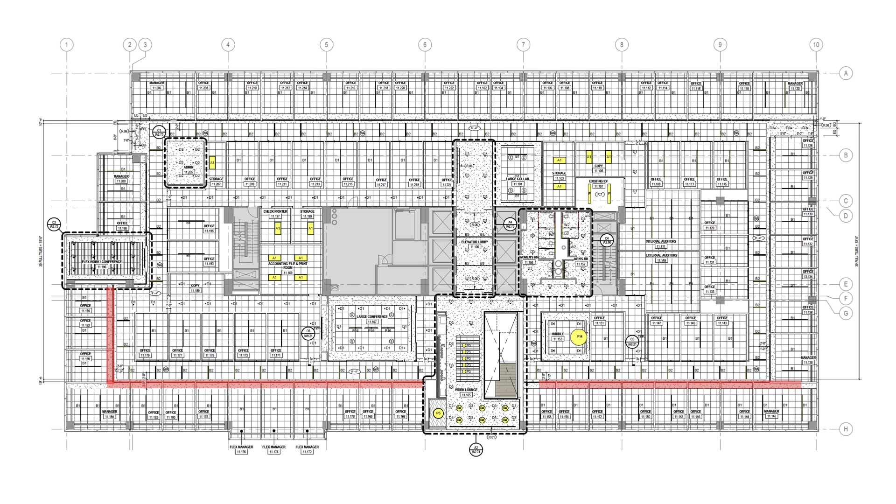On this segment of Build It Better, we're in Houston, Texas, and we're standing in front of a vintage 80s or 90s office complex, multi-story, multi-building, and it's going through a major facelift with a lot of new tenants moving in. There's one tenant that's taking multiple floors, and they have miles of corridors separating the perimeter offices from the interior offices. And separating those offices from the corridor is a bulkhead.

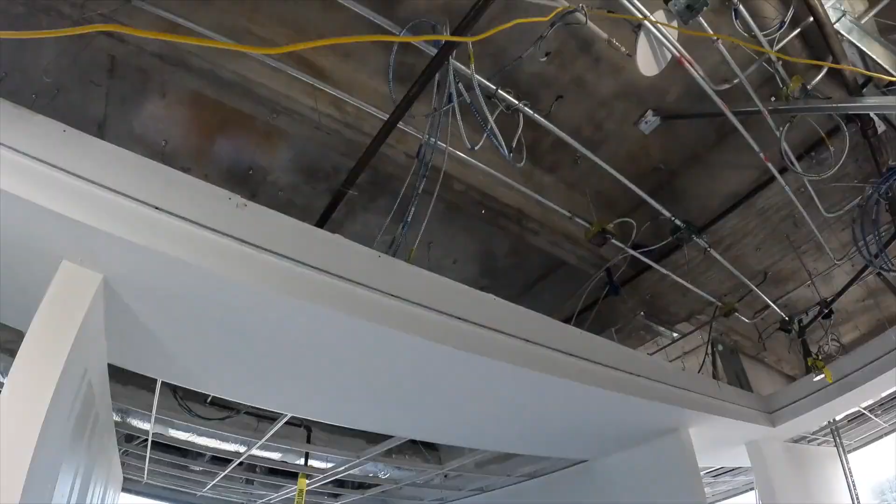And traditionally that was going to be made out of stud and track, but it's being made here out of Simple Soffit. And then drywall partitions are attaching to it. So we're going to go in upstairs to check out how the Simple Soffit is really changing the way that this project is being built.

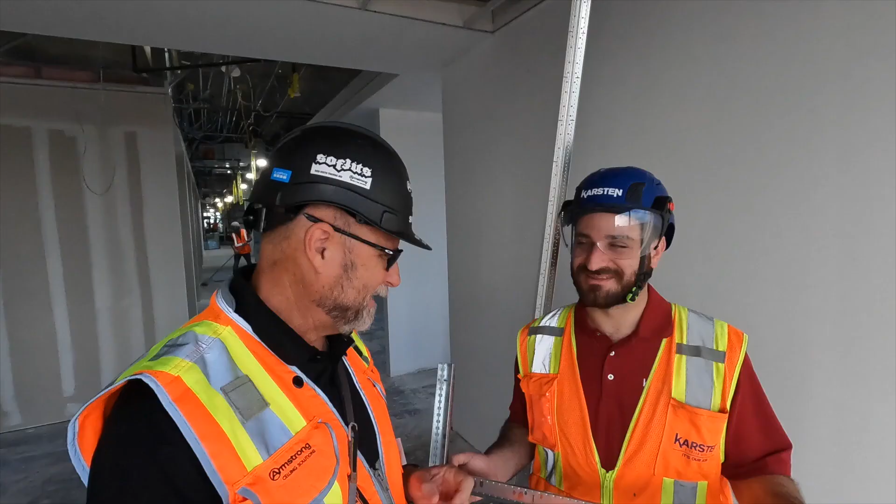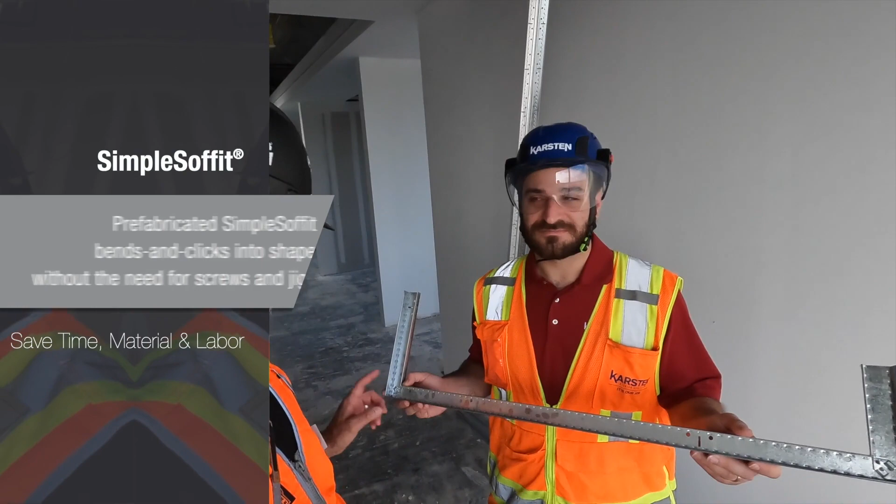I have Sal Taramina here, and Sal's with Karsten Interiors, and they're doing all the work on this multi-story project. What they're using is Simple Soffit, and they're doing multiple soffit bulkheads throughout this project that ultimately drywall partitions are going to tie up into underneath. And like you see up here, it's all these cut up offices and hallways and these soffits running throughout the project.

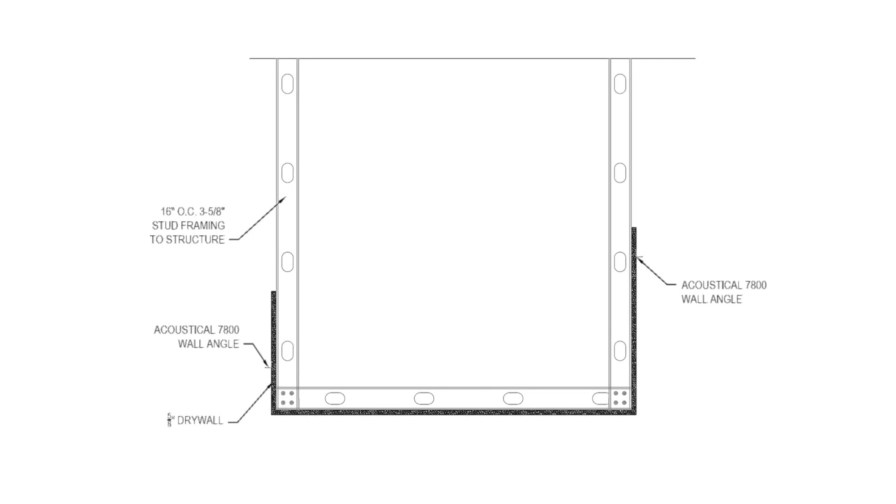How did they design this on the plans when y'all were taking this off? Well, originally we had studs. We'd have to put track at the deck, then run your studs down, and then put track at the bottom, and then run your studs across. It was 16 on center, maybe 24 at best.

Yeah, so shooting the track up, dropping the studs, even 24 on center, that's a lot of time. Yeah, it's definitely a lot. It takes a lot of time. It also congests the plenum with more studs going to structure for your MEP trades. Yes, the MEPs would have had a lot harder time to get through that structure.

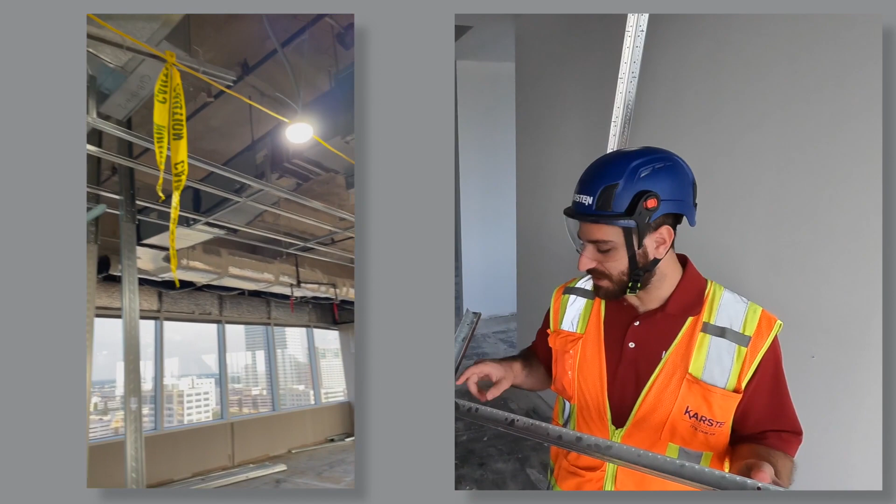And then we had to brace it off every 4 foot. These can be placed 48 inches on center. So we had two 4-foot T's that we had to connect for each Simple Soffit. So basically, with 3 runs of cam, 2 runs of T's, and a main runner every 4 feet, your biggest item in this whole soffit is all of your cam, your utility angle.

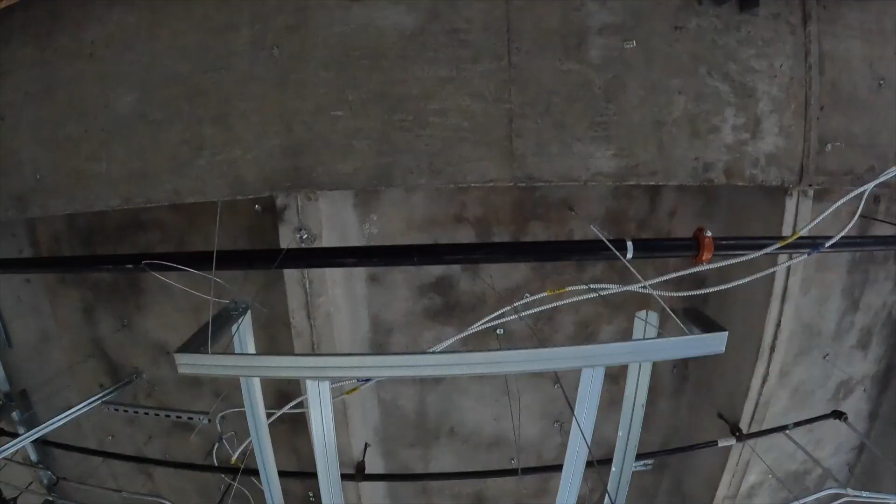Correct. And with the Simple Soffit, the cost is a little bit more than a normal main runner. But in light of the fact that this only makes up about 18%, 20% of your soffit, was that a big impact? If you go 16 on center, now I'm doing 3 drops instead of 1. It almost makes up for itself. And then on the production side, it really helped with the production.

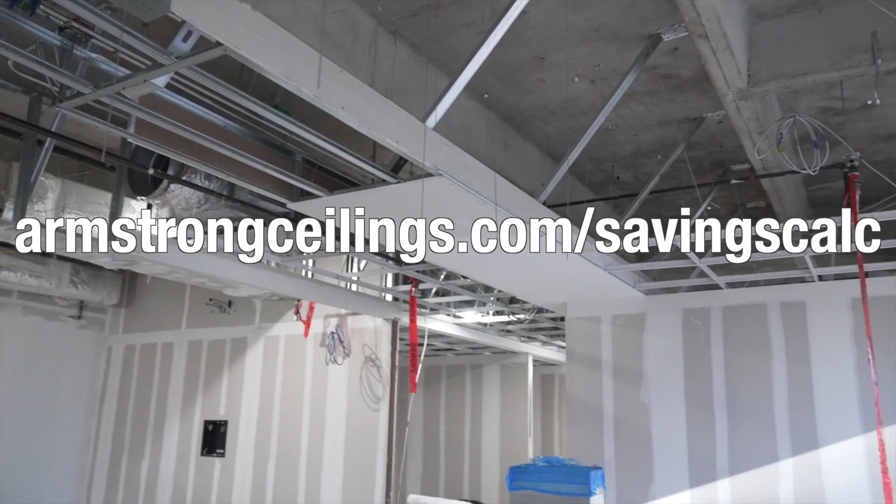Thanks, Sal. Your team did some beautiful work on this project. To get an idea of what you could save, we ran the 2,400 running feet of soffit condition on this project through our time, material, and labor savings calculator. A project like this could save $10,000 while also reducing your labor from 57.4 to 16 man days, all by changing your framing from 16-inch on center stud and track to 48 inches on center Simple Soffit and drywall grid.